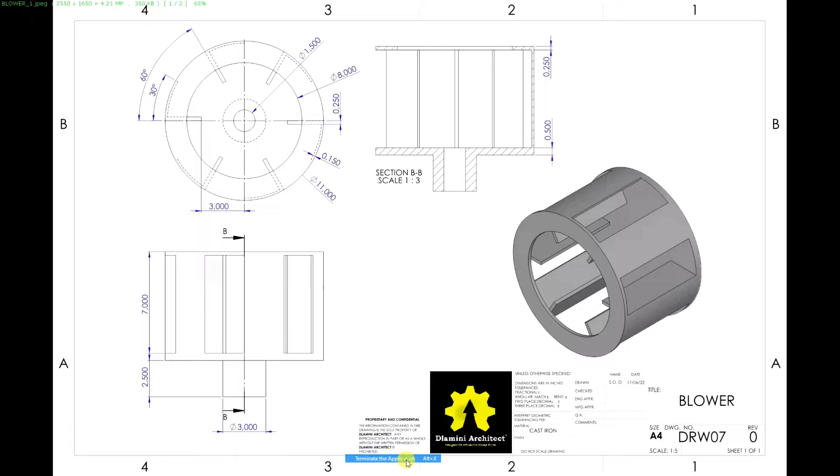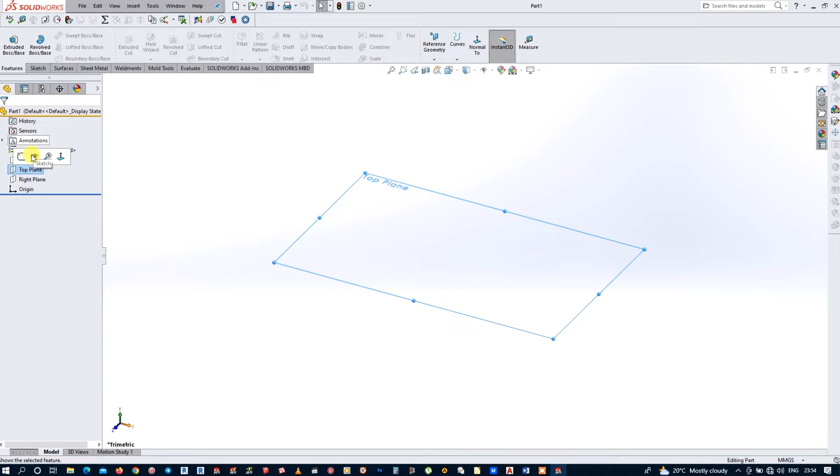Start a new part file. Open a new sketch on the top plane and do a circle.

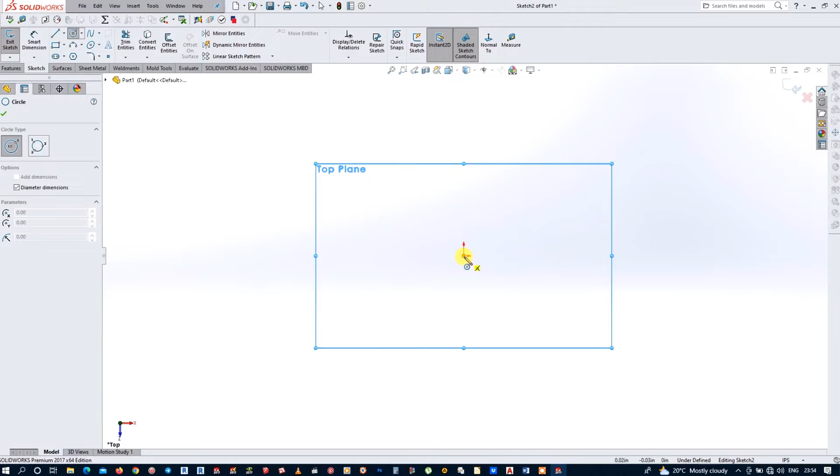I forgot to change the units, so we're using inches for this one. I'll sketch on top plane, do one circle, 11 inches diameter.

Do another circle. This one is 1.5 inches. That's perfect. Do another circle again, a lot of circles. This one will be 3 inches. Right.

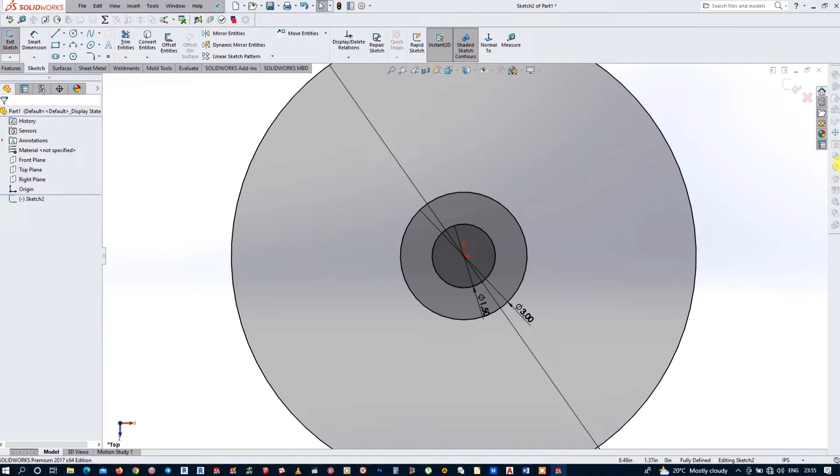Now we exit the sketch and start extruding. Pick the extrude tool, close contour, so select this part and that part. Extrude it up to 0.5 inches. That's perfect.

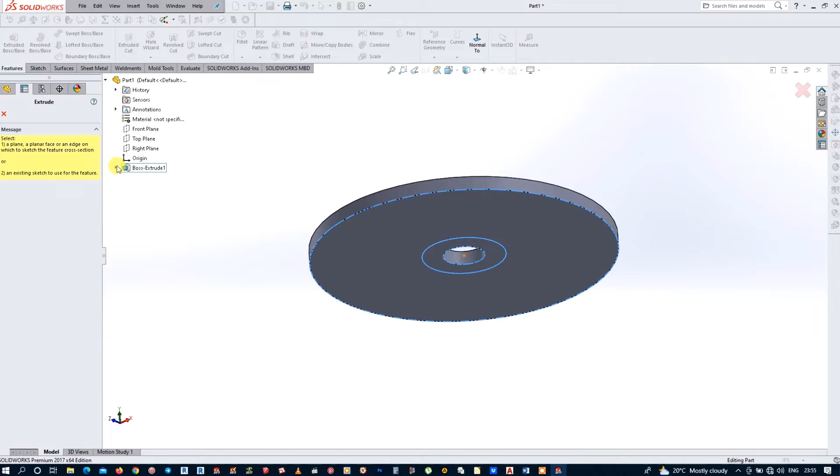I need to do another extrusion for the other part. Go extrude, select that sketch again from the drop list. There we are. Select that inner part, change the direction of extrusion. Extrude up to 2.5 inches. Perfect.

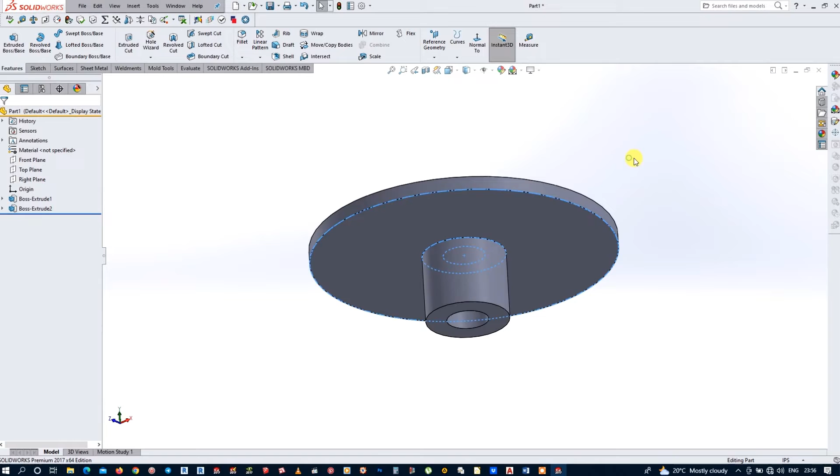Now make a sketch on that face. Create sketch. Make a construction line, horizontal construction line from the center to the core, to the edge of the circle.

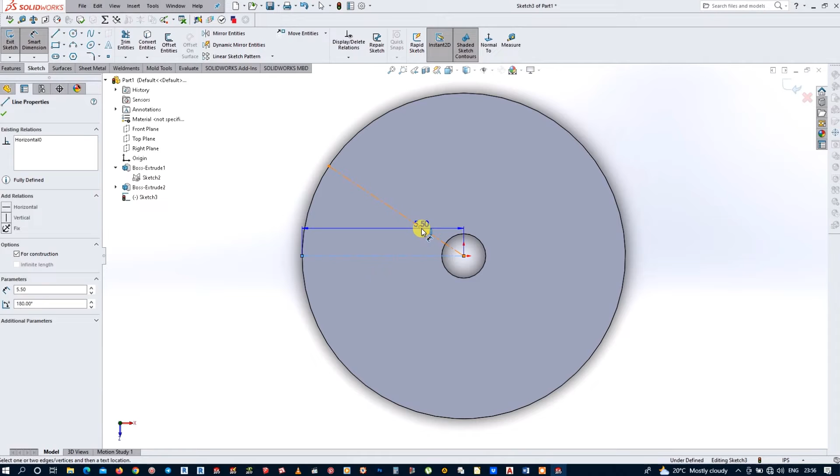Make another construction line, also at the circumference of the circle, but the angle between these two lines should be 30 degrees. Now lines are fully defined.

Now let's get some geometry going here. I think I'll go with the line tool. Go one line, go another line to hit the edge of the circle and stop there. Now to another line, same thing, ends there.

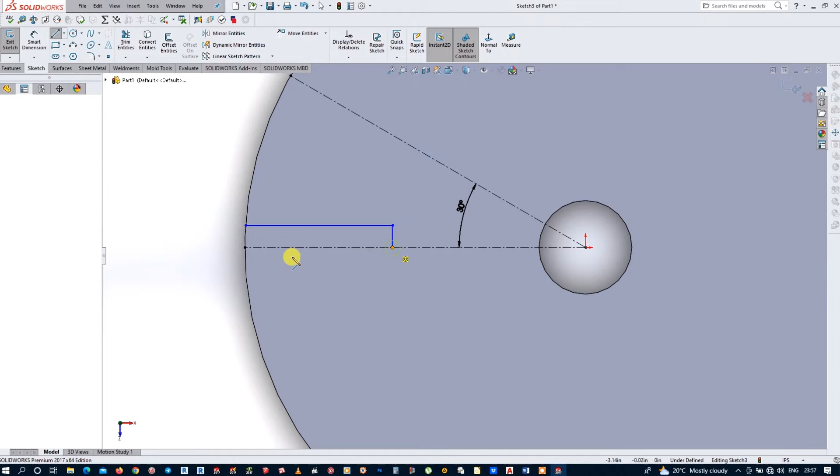Now select the edge and convert entities. That's going to bring that line to our current sketch. Now another line, keep it in line with the construction line. In this way it's going to go. You can just eyeball it for now, we'll define it later.

Now offset this edge here by 0.15 inches. Just reverse the side of it, got it. Confirm. Okay, got that. Now let's dimension.

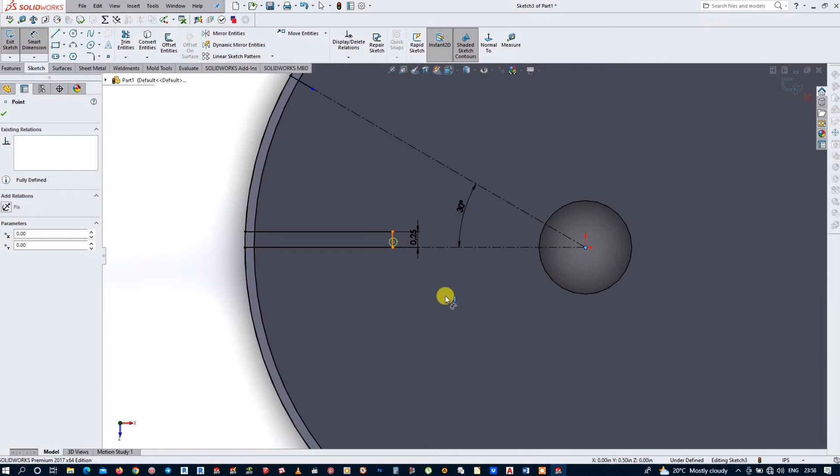Dimension. From there, that is 0.25 inches, and from the center to that line should be 3 inches. This edge, just move it to the corner there, it will snap.

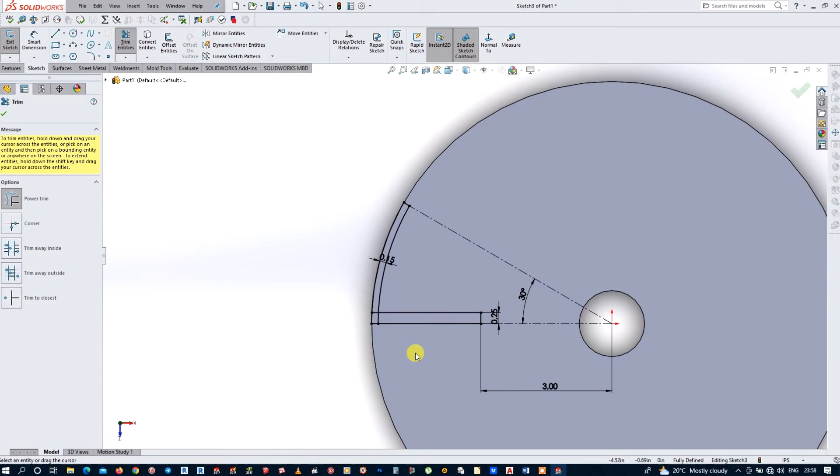Got it. Let us trim all the excess geometry. Get a trim tool, power trim, run it through. There's nothing left there. Also those interlocking lines there, like that. Done. Beautiful. Now our sketch is fully defined.

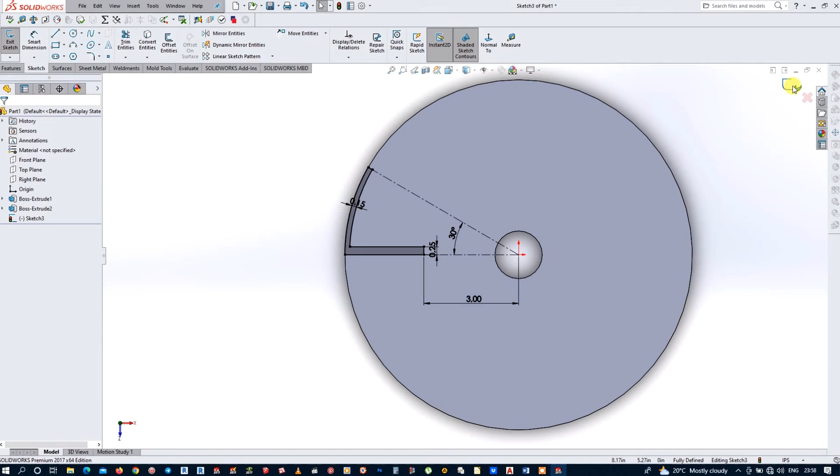Let's close the sketch and extrude. Extrusion tool. Extrude that to 7 inches. Beautiful.

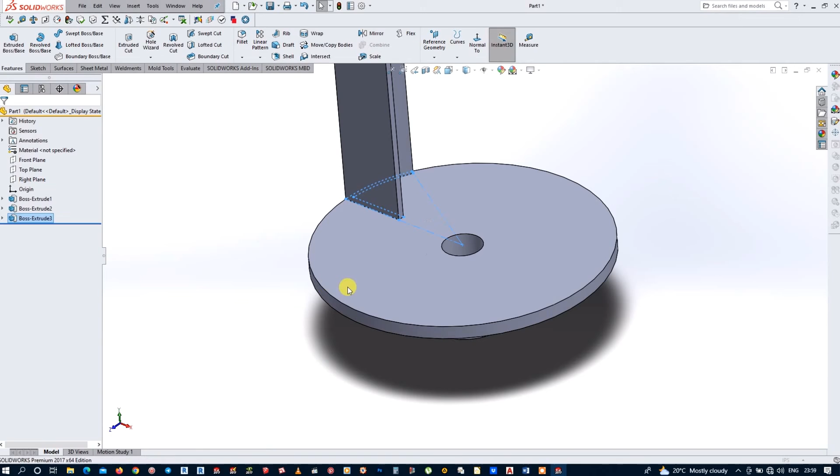Now while it is still selected, just go to the linear pattern tool. We need 8 of these, so circular pattern, pick a circular edge. Change the number to 8 units. There, beautiful, I got 8 of these. Our fan blade shape now.

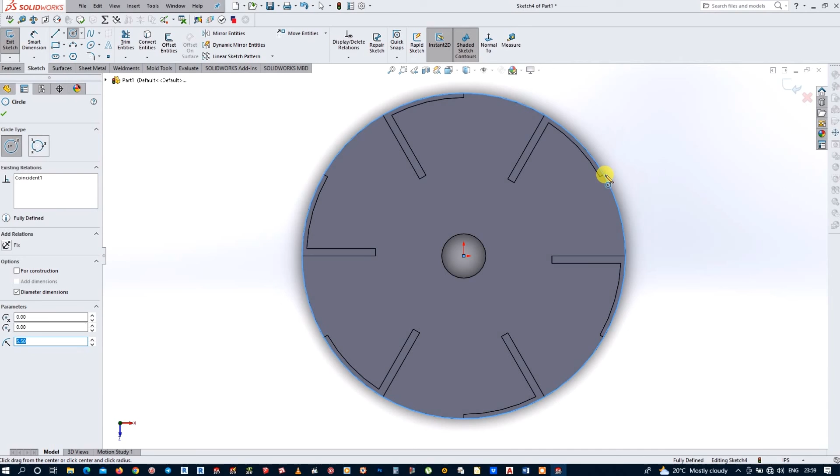Pick that top face there, make a sketch. I need to put 2 circles in there. That's not gonna work, you can't do that, so you need to draw the circle out straight up. Just hit the edge there, it's gonna snap to 11 inches. Another one, this is going to be 8 inches. Beautiful.

Now you close the sketch and extrude. Change direction of the extrusion and extrude to 7 inches. Beautiful.

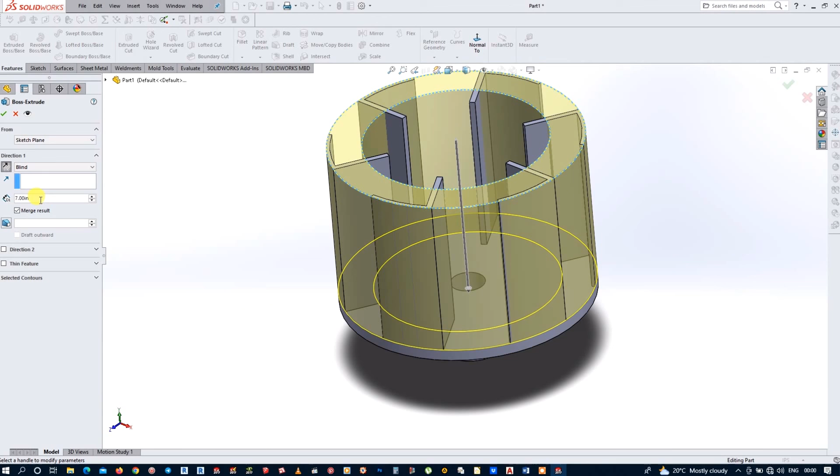Our part is finished.